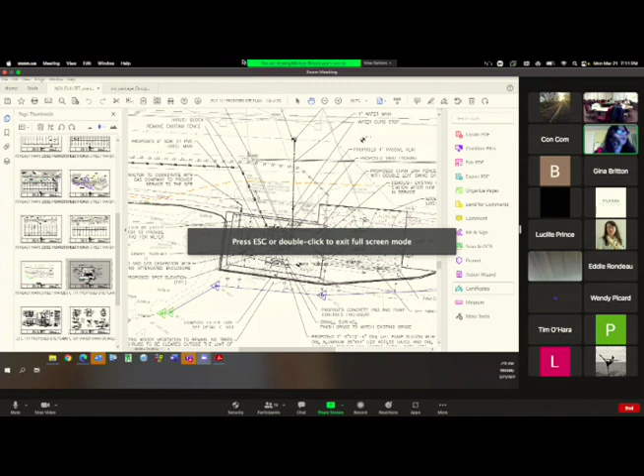Just to dive right in, I'll talk about the changes to the pump station. This is a replacement pump station, an upgrade to the existing pump station on Gilboa Street. The majority of the comments that arose during the last meeting were relative to the position of the components of the pump station replacement relative to proximity to the river. So we made some modifications to the design. The driveway has been reduced from a 13 by 35 foot driveway to 10 by 35, so we pulled it further away from the Mumford River. We're now proposing it to be paved per your recommendation rather than the regrind asphalt. We also designed a stormwater swale parallel to the southern portion of the proposed driveway, between the driveway and the river, to intercept stormwater and conduct it away from the river.

Then in terms of the pump station facility itself, we pulled the fence and the footprint further away from the river. The closest point is now the southeastern corner of the fence, 8 feet to the mean annual high water line of the river, also coincident with bank. We slid the components around and put some labels to show you; for example, the generator is now 15 feet away from the river, and the electrical enclosure stand has also been moved in a northward direction. So all in all the components, including the fence, the footprint, the driveway, are all further away from the river than what was originally proposed.

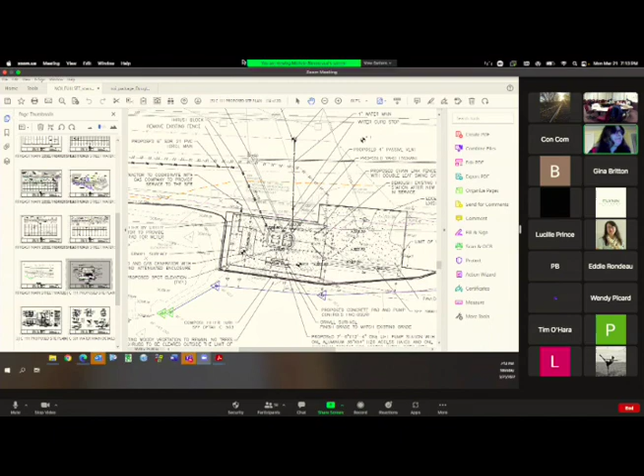Additionally, one of the commission members wanted clarification on what we were proposing to do post-construction between the fence and the river. What we're clarifying is that existing woody vegetation will remain. No trees or shrubs will be cleared or cut for the project. Any remaining disturbed area, for example what was disturbed by the sedimentation control, will be loamed and seeded in a native conservation seed mix, wildlife mix. It's a low maintenance, easy growing, native only plant mix that will be put down in that location and in disturbed areas post-construction.

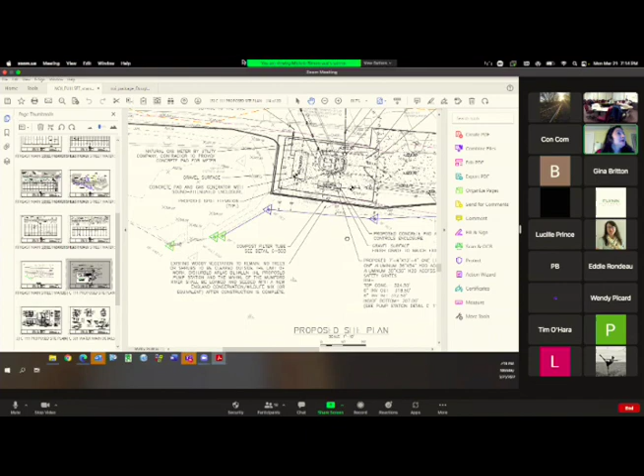I believe that was the majority of the comments for that area. Are there any questions on that, or should I move over to the Northeast Main water installation? I think you've captured a lot of our concerns. Board, any additional comments on the work? You've captured my concerns. I just was going to ask about the swale.

I see some lines there and some grading that are along the edge of the path, but how do we know, where does it convey the water to? Sure, let me call up a detail, and I might defer to Gina, who's the engineer on the project, to address this question, but let me call up the detail that she'll need to help speak to that.

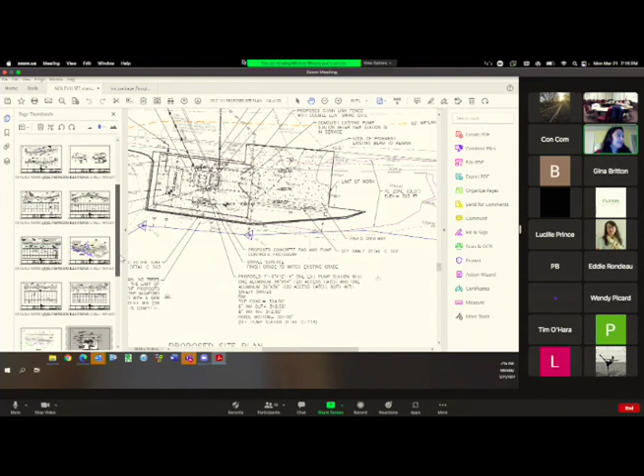That's the right sheet, Michelle. You just have to go over a little. Oh, okay. Yeah. I thought it's because I didn't have my glasses on. Yeah, there you go. There we go, okay.

So what we put in here along the southern edge of the parking area would be just an earth-graded swale with slopes, as shown, to divert any runoff away from the river towards the parking lot, and then therefore into the road. We would request that the contractor, of course, works with the Conservation Commission in addition to providing a submittal on this when it gets ready to be constructed.

So what we also included here was a synthetic liner to help with some of the erosion control. Certainly that's up for conversation if you want something different than that. Okay. The synthetic liner's in the bottom of the swale? Yep, and on the slopes. The filter fabric? Yep, across the whole thing. It's that kind of double line there that Michelle's tracing over.

Is that something permanent, or is that just when you're seeding? It helps to let the seeding germinate a bit easier. So it protects everything. Okay. All right, thank you. Absolutely. Okay, is it okay if I switch over to the Northeast Main Street work?

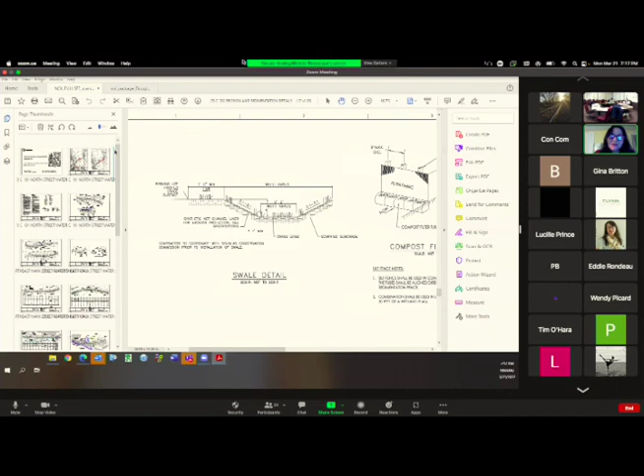Yes, please. Okay, sure. So the comment here on Northeast Main Street, let me get to the right sheet here. Just a refresher that the only work going on here is in the roadway. It's for the replacement installation of the water main. But a question arose about how we would be conducting the work relative to this existing culvert that conducts Wetland Brook under Northeast Main Street.

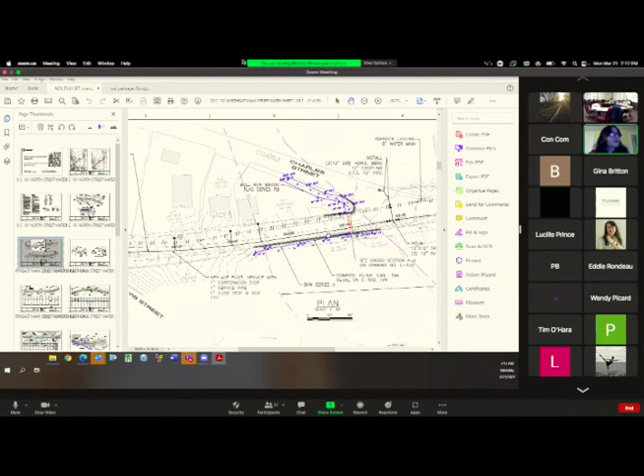So what we did to address that is provide a detail showing where the new pipe would be relative to the existing culvert, and it will go under the existing culvert. So here's the existing culvert. This will be the new water pipe. Gina can explain this more, but the reason it has to be constructed this way has to do with the alignment of the pipe and maintaining grades. The work in the road is still going to be cut and cover.

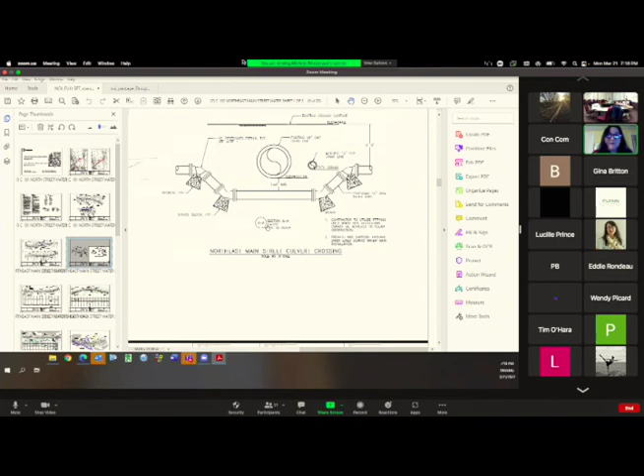In terms of any BMPs relative to the construction of the water main in this location, as Gina mentioned, that would be more of a contractor specification. But this is the detail of how it would be constructed. Steve, did you have any comments on the BMPs that they're using? It was more about the method of how they're going to traverse underneath. I wasn't sure if they're doing horizontal drilling or just the technique of going under the culvert pipe.

Okay. So it probably will be open cut. We haven't designed a directional drill for this application. That's a lot more complicated of a design. It would be a submittal that the contractor would give us as to how he's going to exactly do it when he gets there. Typically, they may excavate on either side and push the pipe through. It's not a major length of a crossing.

I was fine with that. I just wanted to make sure you're aware that it wasn't discussed at the first meeting, and it's really a perennial stream, so the water is going to be there when you hit that section of the roadway. So if they have some methods in place for protecting the stream, and BMPs, that would be fine with me. Okay. Absolutely. Okay, thank you.

Absolutely. And just for the record, we did submit a revised set of plans. Gina stamped them. It's a full set of plans that we resubmitted, revised through March 14th, for referencing the order of conditions. Okay. And Mass DEP also got a copy of all the same materials as well. Okay, excellent, thank you. Yeah, so revised through March 14th, 2022.

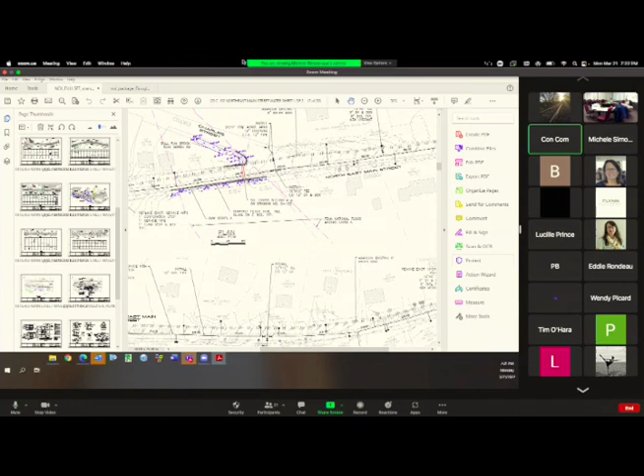Okay, Steve, you did say number 9 was continued, right? I would continue number 9. We're still waiting. We can do April 4th, or you can do the April 25th meeting. Let's do it April 25th. I'll entertain a motion to continue the public hearing for Shore Road Lot 299, parcel 7.16 to April 25th. So moved. Motion made by Mike, second by Mark. All those in favor? Eric Harris, aye. Mike Rocco, aye. Mark Mongemi. Tracy Sharkey, aye.

Okay. Next item I'm going to take is 16. What one did you just do? Number 9. Number 11 is going to take too long. Okay. And then number 13 hopefully shouldn't take too long. All right. Let me get ready.

So 7 p.m. RDA public meeting, request for determination of applicability, 29 Laurel Glades, installing a patio area. The Town of Douglas Conservation Commission will hold a public meeting for Kenneth Boone on March 21st, 2022 at 7 p.m. in the Municipal Center, 29 Depot Street, for work to be done pursuant to the Town of Douglas Wetland Bylaw and the Wetlands Protection Act, Mass General Law, Chapter 131, Section 40. The proposed request for determination of applicability work location is 29 Laurel Glades, and the applicant is requesting a determination of applicability for existing patio and permission to plant trees.

Public participation will be available by attending the meeting at the Town of Douglas Municipal Center located at 29 Depot Street, Douglas, Mass, or pursuant to Governor Baker's June 16, 2021 order suspending certain provisions of the open meeting law, General Law, Chapter 30A, Section 18, the public may participate in this meeting via remote participation. A website for the meeting will be provided on the conservation agenda posted on the town's website, douglas-ma.gov, at least 48 hours prior to the meeting. Copies of the request may be examined electronically by contacting the Conservation Commission at 508-476-4000, extension 205. One time, March 11th, 2022.

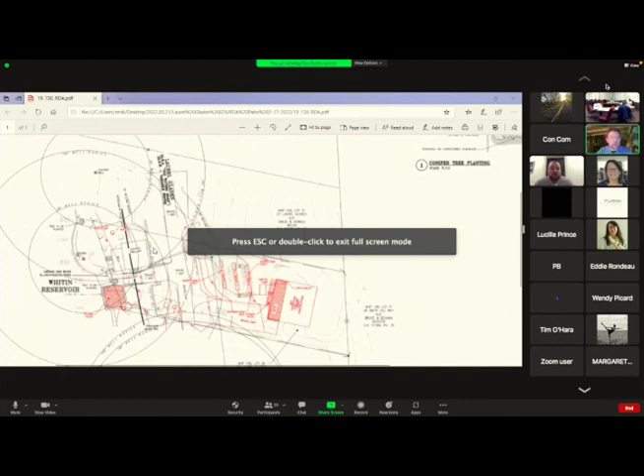And who's presenting for this? 29 Laurel Glades, name and address? My name is Byron Andrews, Andrews Survey Engineer. Take it away. Okay, so if you recall at the last meeting that we attended on this subject, the determination was made to do an RDA for the patio. The patio is in the same location we showed on the as-built plan previously. We prepared an RDA plan, which is another version of that plan, with the exception that we added 2 trees to be planted. One of them is near the patio, and the other one is in the corner of the lot near the water, opposite the patio.

So a total of 2 maple trees proposed? Or what are you proposing for planting? Especially the one right on the, I don't see it, tree to be planted? Okay. Yeah, they're shown in black and white. Okay, so what type of trees? Initially, we proposed maples, but we're open to consideration of what the commission may request. I believe the original order of conditions had evergreens or another kind of evergreen tree or spruce tree. However, our feeling is that maple trees would be better shade for the water, but we're open to the commission's suggestions if they feel otherwise.

Okay, and you've already planted the maples anyway, right? Yeah, we have 4 maples that have been planted so far. Okay. So board, this is essentially permission to allow that patio to remain, in addition to the 2 additional trees.

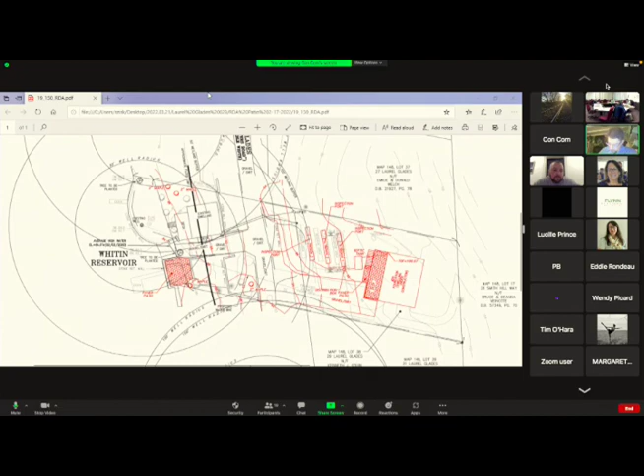So the conditions would be allowing the existing paver patio to remain along with 2 maple trees to be planted along the bank at the northwest corner. Yeah, I would want to be more specific about the type of maple tree. I think that a red maple would be better, rather than just calling out maple. There are so many varieties. Most likely they've got red maple there, right?

Yes. That'll do. Brian Duff, 29 Laurel Glades. The 4 trees that we already planted were red maple, so I would not object to doing 2 more of those. Okay, thank you. Thanks for chiming in. Okay, go with those 2 conditions. I'll entertain a motion.

I'll make a motion that we approve the negative RDA with the 2 conditions that the tree that is proposed for next to the patio be either moved or another tree added in the area next to the bank between the existing well and the dock. Is that what you said, Byron? Proposed tree to be planted.

That's the boat ramp. Yeah, proposed boat ramp. Oh. You want to put it there? Between the boat ramp and the well? Yeah, I think that's where your cursor was. Okay. Yeah, sure. Sorry. That's all right. And what was the second condition? That the existing patio can remain as is. Yeah.

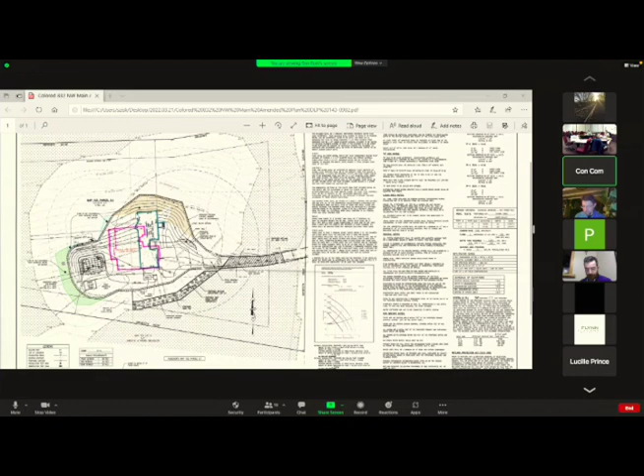But if you go for amended, the original amount of riverfront area disturbed on the plan with the approved NOI is, I think, 7,500. So you have to go less than what was on the original approved plan. I gotcha, yeah, if you're going in order to be amended. Yep. So they came back and they filed a new plan. So I'll bring that up right now. Which brings it under the original amount that was disturbed. Okay. And then we'll just double check, make sure that when we have the amended order, it has all the correct actual calculations.

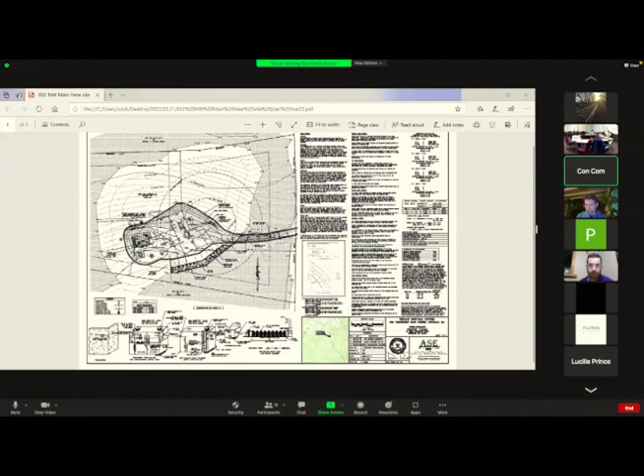Yes, the only thing, I think the new engineer mislabeled the riverfront area. He put 75,000. I think in the original one, Brian, on the order of conditions, it's roughly 97,000. He cut himself short on that. So is the riverfront area disturbance noted on this plan? It is, but he's got the wrong calculations. He's got the amount, let me see if it zooms in. So he's got 7,510 square feet of disturbance, which is less than what was originally approved. So it checks that box.

So what is the number for the requested riverfront area disturbance total? 75,010 square feet. 7,000. Yeah, 7,000. 7,500. Yeah, okay. I kept saying 97,000. Okay. So, board, do we have any questions or concerns regarding this? Or we've got a decrease in impacts? No. Just have to get the numbers right. Correct.

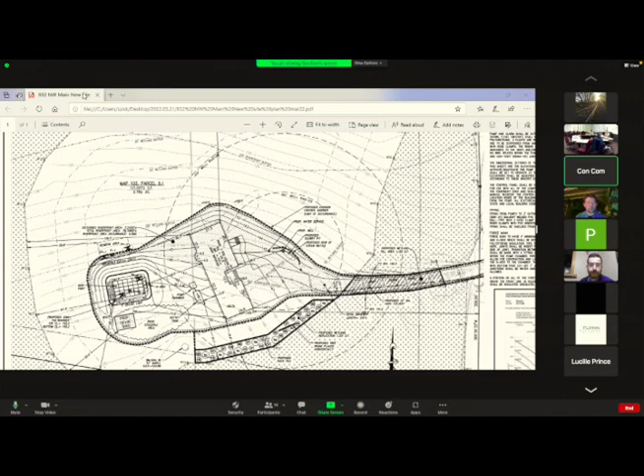Okay. All right. Anyone in the audience have any questions or concerns regarding this filing for 832 Northwest Main? Seeing none, I'll entertain a motion to close the public hearing. Motion made by Mike. Second by Eric. All those in favor? Eric Harris, aye. Mark Mungem, aye. Tracy Sharkey, aye.

I'll entertain a motion to issue the amended order of conditions with the decrease in the total riverfront area impacts. So moved. Motion made by Mark, second by Eric. All those in favor? Eric Harris, aye. Mike Greco, aye. Mark Mangum, aye. Sharkey, aye. Thank you very much.

Okay. Thank you guys, appreciate it. And thank you, Steve, for all your help during this, I appreciate it. You're welcome, Tim. Call me anytime.

Okay, the next three, don't have. Steve, do you want to do number 14? They continue to April 4th. The legal ad didn't get in time. Okay. Number 15, notice of intent, 0 Mumford Road and 5 Forest Street definitive subdivision plan, Sutton Douglas Development LLC. Do we have the legal notice? Should be in your folder. Your mail folder. I have one.

That's all I've got. Oh, what's this? Nope. Not your folder. Yeah, I only had two pieces of paper in the mail, I think. Want me to bring one down? No, I think I probably have it. Hold on. It's the ball one. Okay. Public hearing notice. Oh wait, this is the second. Yeah, if you could bring me one, Steve, that would be great. Please.

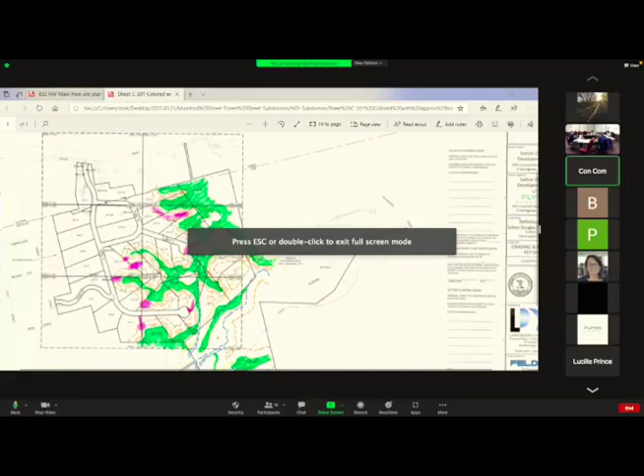Sorry about that. Okay. All right, next hearing, Town of Douglas Conservation Commission pursuant to Mass General Laws, Chapter 131, Section 40, Massachusetts Wetlands Protection Act. Town of Douglas Conservation Commission will hold a public hearing on March 21st, 2022 at 7 p.m. for the notice of intent application filed by Flynn Building Development located at 0 Mumford Road and 5 Forest Street, Douglas, and 61 Duval Road, Sutton, for work to be done pursuant to the Town of Douglas Wetland Bylaw and Wetlands Protection Act. The proposed work involves development of a 31-lot residential subdivision on 5,735 feet of proposed roadway with associated stormwater management system. All work in the Conservation Commission's jurisdiction is buffer zone only, and no wetland alteration is proposed.

Public participation will be available by attending the meeting at the Town of Douglas Municipal Center located at 29 Depot Street, Douglas, Mass. Pursuant to Governor Baker's June 16, 2021 order suspending certain provisions of Open Meeting Law, General Law, Chapter 30A, Section 18, the public may participate in this meeting via remote participation. A website for the meeting will be provided on the conservation agenda posted on the town's website, douglas-ma.gov, at least 48 hours prior to the meeting. Copies may be examined electronically by contacting the Conservation Commission at 508-476-4000, extension 205, March 11th, 2022. Mr. Sullivan.

So, name and address for the record. Hello, Madam Chair, Wayne Bellick, Land Design Collaborative, here on behalf of Sutton Douglas Development. We're joined by Tim Flynn tonight, who's participating remotely.

And if I could, I noticed that Steve has an exhibit up here. I sent Steve some information today, a PowerPoint slide presentation. Yep. And I would like to just have that up because we can follow that. Yeah, let me grab those while you talk. Hang on. All right, thank you, Steve.

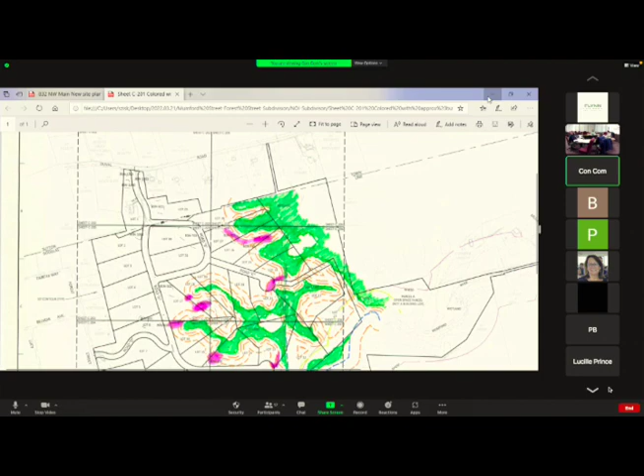Did you get a DEP number yet? We have yet to receive that. Did you try and call him? I did. I know that Kimberly Roth is reviewing it. Okay. They're usually pretty good for that. They do request them and usually pretty good. But not sure what's going on. It's crazy. It's okay, I got it right here. Town of Douglas got theirs before you. I'm sorry? Town of Douglas got theirs. That's what I understand. And you must file that.

It was a nightmare with the advertising with the T&G. That was a train wreck. Wait, can you see that, Ryan? I could see it. Okay.

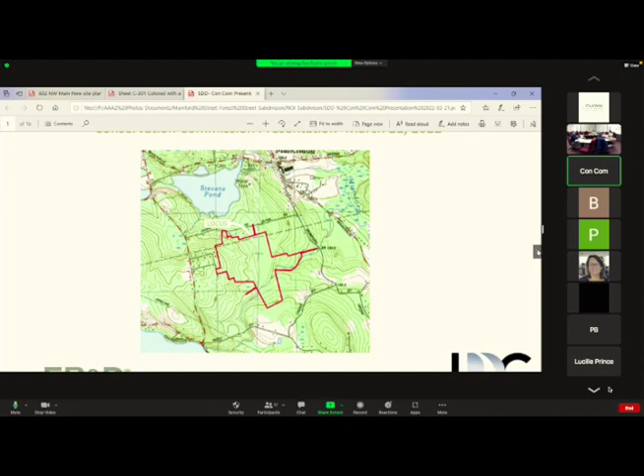Okay, Madam Chair. Again, Wayne Bellick, Land Design Collaborative, here on behalf of Sutton Douglas Development and Tim Flynn. If I could ask you, Steve, to scroll to the next slide. So again, the project owner is Sutton Douglas Development. The applicant developer is Flynn Build and Develop. We're Land Design Collaborative. Land surveyor was Feldman Geospatial. The wetland scientist was Northeast Ecological. And the hydrogeologist on the project is Corporate Environmental Advisors.

Thank you. So, first thing I wanted to do, Madam Chair, was get you up to speed with where we've been with respect to the hearings. So we opened, or tried to open, with the Douglas Concom on March 7th. As you know, there was a hearing agenda, but again, due to a T&G faux pas, we couldn't hold a public hearing. We then, on March 10th, met with the Douglas Planning Board, opened the public hearing, presented, and the hearing was continued to the 14th.

On March 14th, Sutton Planning Board opened the public hearing. We presented there as well, and that is continued to April 11th. And the project presentation, of course, is going to be by LDC, and then we'll get into the question and answer period. Next. Project permitting history.

So this commission will recall back in May of 2021, the resource areas that were delineated by Northeast Ecological Services were confirmed by this commission. We received preliminary plan approval by the Sutton Planning Board.

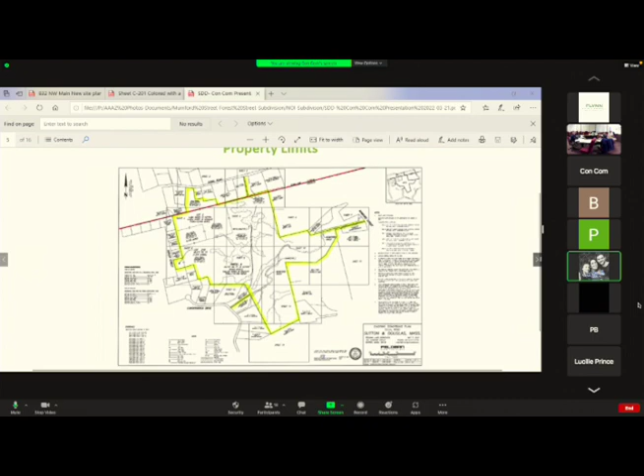So this exhibit represents the existing conditions plan, a blow-up of that area. What you see in here in the lighter green is the wetland delineation and the wetland system that was confirmed by this commission last year. As you can see, to the north of the site at 61 Duval Road, there's an existing home with access to Duval Road. To the southwest is 5 Forest Street that also has an existing home on it. Those are the only two portions of the property that are currently developed with residences.

The site is, again, 130 acres, generally wooded, and topography on site starts at a high on the westerly side of the site and descends at various grades down to a wetland system through the center of the site. It's hard to see, but there is a ditch, there it is, thank you, Steve, that goes from south to north. And that eventually flows into a 36-inch corrugated metal pipe culvert under Duval Road.

Now, I bring this up because of the runoff that comes onto our property. As you folks are familiar with, the Forest Street development was developed by others way back when, and as we did our due diligence in the field, collecting data and confirming topography and delineating the limits of the watershed, what we observed was that the stormwater runoff from that subdivision is totally unmitigated and flows onto the property. It flows across the property and is collected by that channel that goes from south to north and then goes to Duval Road.

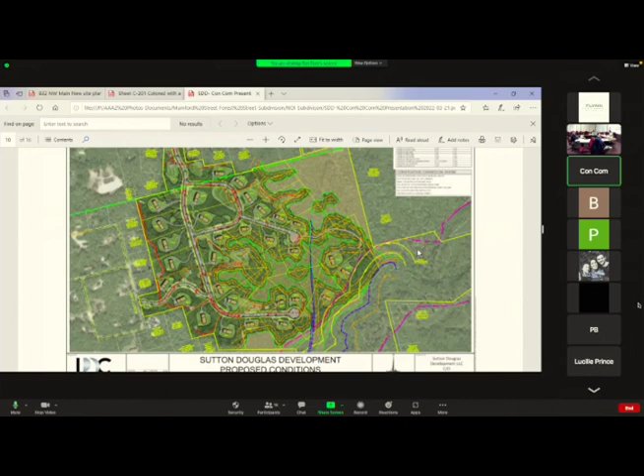And if we could scroll to that second to last slide, I think that kind of tells the story, this right here, Steve. I know that you had requested a slide that showed in red the stormwater management system. It shows all the pipes, it's all color-coded as required by the Commission. You can see there are some buffer zones on the site. There is some riverfront area. We're not doing any work in that, and relatively speaking, very little work in the riverfront area.

So one of my comments from my checklist, I think I submitted last meeting, was that the NOI should clearly state that it's for the road only and the infrastructure. Okay. Right? Any house, any dwelling that is constructed after this notice of intent for subdivision will have to file a separate notice of intent. Correct. And then this has gone for peer review already. That's correct. So as far as our board is concerned, it's being vetted for the stormwater already. So that's taken care of.

So where's the closest point to the resource on here? Where is what? Well, if I could go to that last slide, it probably might have it.

If you're asking me to remember, I'm an old man here, Madam Chair. Okay, all right. So the prior slide, I'm sorry, Steve. So, no, the next one? Back the other way? One more? Yep. One more? Oh, I think we're going the wrong direction. Go second slide from the end, Steve, please. Giddy up. That's it, right there. There you go. So this might be able to answer the questions, Madam Chair.

Thank you. But if you could just clarify that this is just the roadway, so when there's houses that are going to be built, they would need to come back and they may impact more buffer and wetland. Absolutely, and I'm going to take a look at the application. I thought it was pretty clear, but maybe it was a faux pas on my end, but I thought it was for the roadway and the infrastructure. Well, it should be, but it's just not. Usually they put road only on your description. Gotcha. Yeah, because it says development.

Because in this plan, we do have it in our local bylaw regulations, 4.06 self-imposed hardship may come into effect. So as you develop some of these lots where you're crossing that ditch and you're crossing some wetlands, you just have to take into consideration that you could be creating your own hardship for some of these future developed lots. Understood.

You may want to look at that local bylaw. Yeah. Which section was that, Madam Chair, again? 4.06. The regulations. Yeah. The Douglas wetland regulations. Yep. Yeah, the public notice was development of a 31-lot residential subdivision on 5,735 feet of proposed roadway with associated.

So it could be ambiguous on that. Yep. So as far as revising the application, we just need to let DEP know that it's just roadway only. Yep. That might be also why they're taking their time with that number. Okay, well, actually, board, do we have any questions for right now? Mike's already seen this. Mike, do you have any questions at the moment? Not at the moment.

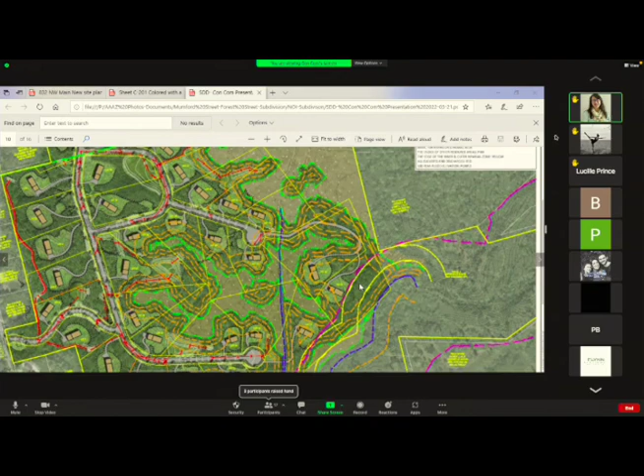Okay, anyone online have any questions or concerns regarding this hearing? There's a hand up at the top. I have a couple of people who have their hands up. Yeah, thank you. Stephanie, would you like to go first? Name and address for the record? Yes, Stephanie Cavino. I am in Worcester, but my boyfriend is an abutter at 24 Mumford Road. My questions are a couple of things. One is regarding stormwater. I know that you said this is going out for third-party review, and I'm just wondering what design storms you used when you were doing that. So did you use TP40 or NOAA Atlas 14?

Yes, I appreciate the question. Please mute yourself if you're speaking. Someone is speaking right now. So I was just wondering what design storms you used for that? That was, through the chair, the 2, 10 and 100, as required by the state stormwater regulations.

In terms of the design storm itself, there's older data that's TP40 that looks at a specific group of storms from the 1890s and 1950s. We know it's outdated and it doesn't account for a very long history. Some newer data, I know DEP has not made this change yet, but they do anticipate changing requirements in order to use NOAA Atlas 14, which uses a larger history of data from the 1800s through 2014. It still doesn't account for larger precipitation events due to climate change into the future, but it is a little bit more representative to ensure that our infrastructure is actually going to last and be able to handle these storms. So I'm not sure which of those data sets you used.

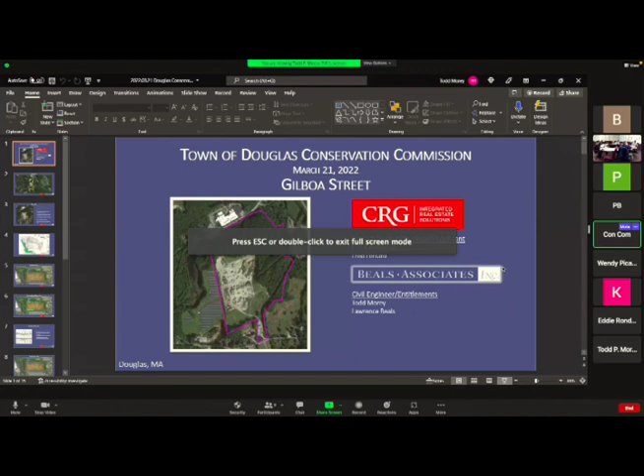All right. So, as noted, I'm here on behalf of CRG Real Estate Solutions. Frank Pecunis and Fred Ferraro typically attend these meetings with me. They were at the planning board meeting a couple weeks ago, and they'll be here, I believe, on Thursday as well. Again, my name's Todd Morey. We're the civil engineers and entitlement managers for these projects that we do with CRG. The project itself is located just off of Gilboa Street, right on the Uxbridge-Douglas town line. It's primarily located within the existing gravel pit, just to the east of the solar facility here.

We were before you, I believe it was late fall, early winter, to present an ANRAD application that was subsequently approved. You folks issued an ORAD after Mr. Allen had reviewed it and done some peer review work on that. Basically what we came up with was the Mumford River flows in here and forms Gilboa Pond, which is really held back by an existing dam. Water flows over that dam, and the Mumford River then meanders its way on out. And then we had some associated bordering vegetated wetlands right next to Gilboa Pond, and some areas of the 100-year floodplain.

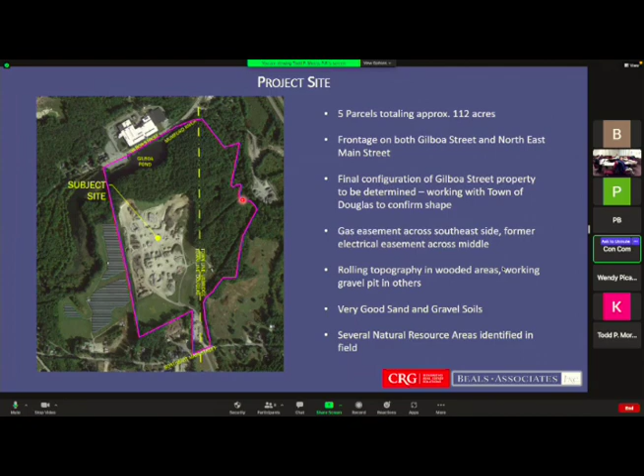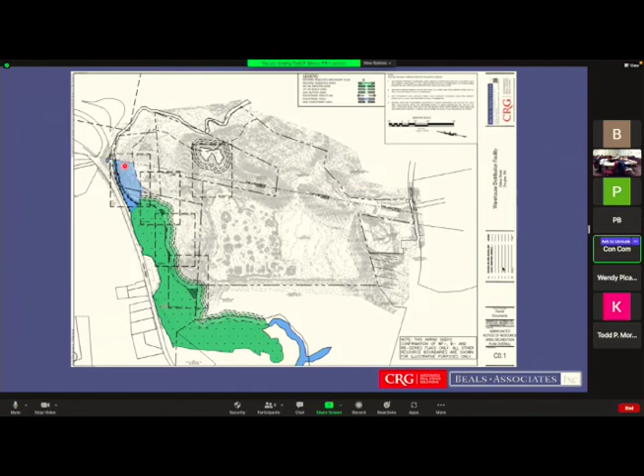Outside of the gravel pit itself, in the wooded area, it's generally rolling topography, no consistent trends, a lot of low areas. Depending on what time of year you go out there, especially up on the Uxbridge side, there may be quite a few low-lying areas, isolated land subject to flooding. In Uxbridge, I think it would be an isolated wetland if it were here in Douglas. Soils generally across the site are very good sands and gravels, given the current use. This is really just a copy of the ANRAD plan that you folks approved. Again, we have Mumford River coming in to Gilboa Pond, this green area, flowing over the dam, and Mumford River coming out. This light blue shade denotes the 200-foot riverfront area within Douglas.

So what are we proposing to do? Our proposed site plan is about 1.1 million square feet of building space, the majority of which is located right in that gravel pit. We have a lot of stormwater management, both underground and surficial, and approximately 651 parking spaces across the site. This shade of green is really where our off-grading occurs, and these dotted lines are your no disturb and other buffers here in Douglas. For the most part, we're staying outside of the 100-foot buffer zones. The two main reasons we're here this evening is we do have impact into the riverfront area, and a minor area of impact into the 100-year floodplain, which I'll show with more clarity shortly. And of course, the riverfront disturbances right here.

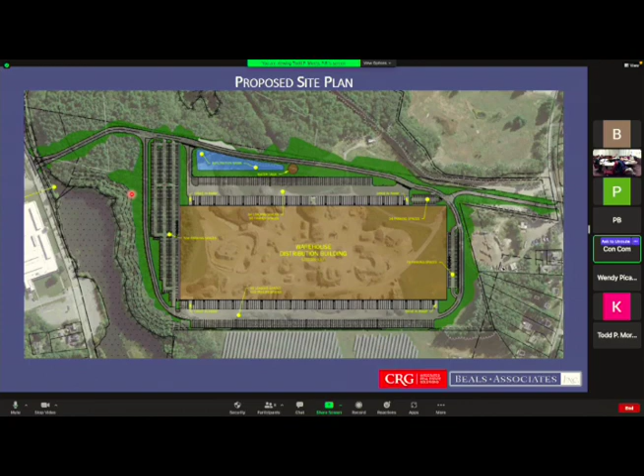Stormwater management, I'll go through again, I'll try to zip through these fairly quickly. The bright green that you see up here on your screen is really a series of catch basins and manholes that lead to some of these underground infiltration facilities. Again, in this gravel pit, some incredible infiltration opportunities. It is just pure sand and gravel right down to the water table.

This end of the site here, generally, we're cutting about 30 feet in elevation, and this end of the site here, we're actually filling about 30 feet in elevation. These systems that we're proposing underneath this truck loading apron are actually concrete chambers. They're about 15 feet tall inside. They are very deep. However, given the fact that we're filling on that end of the site, very simple construction. As we start to bring those fills up, we drop those chambers in and continue to fill right up around it.

Following up on a question that was asked at the last one, those numbers that we modeled that on are either the NOAA 14 or the Cornell numbers. I'm not sure which off the top of my head, but it is in the stormwater report. It's not the old TP40 data, in case anybody's wondering.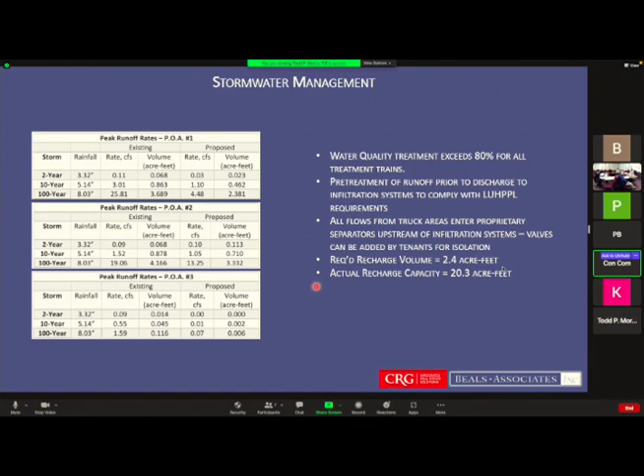And then the recharge, mentioned this a couple of times, tremendous opportunities on this site. The required recharge for a site like this, given the amount of area that we're using, would be about 2.4 acre-feet of water. We actually have over 20 acre-feet of recharge capacity in those systems, as well as the surface pond that you can see on the site plan. Utility plan, probably not all that interesting, so I'm going to skip by that.

So just when we thought we understood what was going on, we got an email from MassDEP, and I've never gotten an email like this from them before. I've gotten emails where they give me the number, so we do have a file number. It's right on there. It's 143-1042. I noticed that wasn't on your agenda. But they came back and they said this project should be filed as a limited project for roadway and driveway crossings in a riverfront area.

I spoke to the other principal in our firm. The two of us kind of laughed and chuckled at that. He advised me to take this, print it, frame it, because we're never going to see it again. So,

even though that's what they want us to do, and we followed up with a letter back to them, this is really all we had to change to make it a limited project. Under 7B, we checked the 1 box instead of the 2 box, the yes box instead of the no box, which we originally had. So that's really the only change we made. We're not going to change our design. We think it was a pretty good design to start with.

We were at 6.4% disturbance in the riverfront area. So we were below the threshold anyway. So my guess is what they did is they actually must have read our alternatives analysis, realized that Gilboa Street entrance was really the only way to do this. Even though we actually did have access out to Northeast Main Street, it was not good to go out there with trucks because it causes some other crossings that would have to be widened.

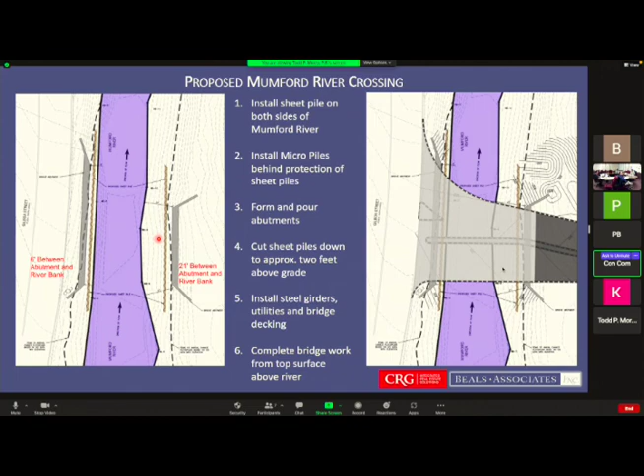In the middle of this slide, I just gave the big picture overview steps of how you build it. Again, install the sheet piles on both sides, install your micropiles behind that, form and pour the abutments, cut the sheet piles down, install the steel girders. We do have utilities being hung from that bridge, and install the deck surface. All that fun stuff.

I'm not sure exactly who did that flagging, but it differs in elevation than ours. So usually when we see riverbank flagging, the definition of a riverbank is either your first break in topo or your mean annual high water, whichever is lower. I admittedly did the riverbank flagging on the right side of this screen a little bit lazy. I did the first break in topo, conceding the fact that if the mean annual high water was actually lower, then that's fine. We'll just go with that first break.

Theirs was higher? Theirs came out higher. So I drew this thin dash line here. So you go across the bottom of the river, and you can see you go up the bank to get to theirs right there. So it's fine. It's a bit of a discrepancy that we noted on the plans. If you look carefully at the plans, you'll see that it kind of meanders up through. Okay. We stayed behind it anyway. Okay. All right, that's good.

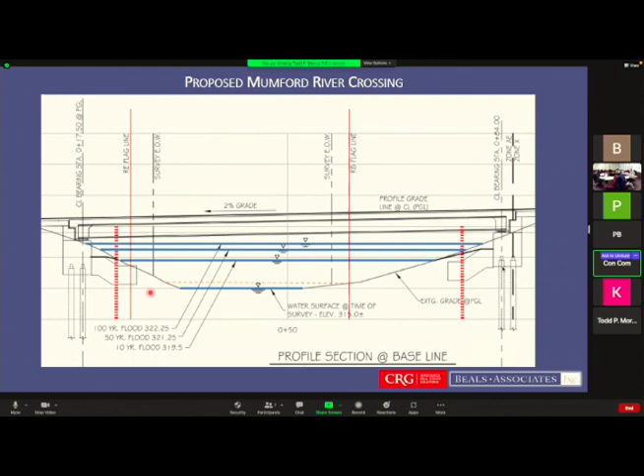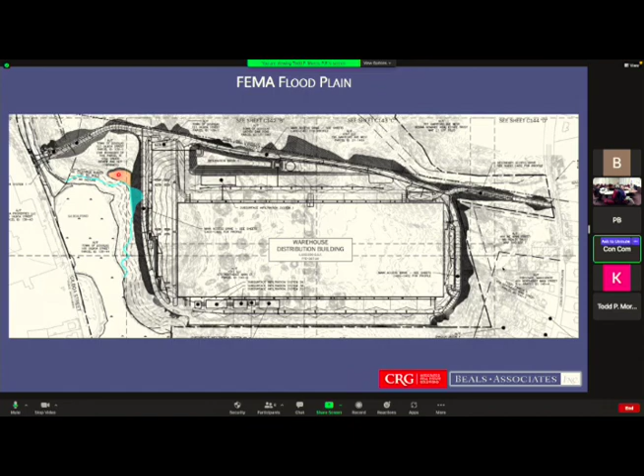And from a volume perspective, when we did it on a foot per foot basis, just about 3,200 cubic feet would be impacted, would be filled. We got about 5,800 cubic feet that we're creating outside of the existing floodplain, but still connected. So about 180% of the volume we're placing in there. And then just discussing interests of the Wetlands Protection Act, but that's probably more for when you're ready to start talking about an order of conditions, which you're probably not there tonight.

Are you anticipating any additional comments from DEP? I'm anticipating no additional comments from DEP. We are, as you're aware, under peer review. Yeah. So I'm waiting to see what comes back on that. Okay. So DEP was pretty much in agreement with the compensatory storage and with the bridge construction. Like I said, I think they must have read the alternatives analysis, which I'm glad they did, because more often than not, it seems like they don't.

They're being very thorough these last couple of years. Very thorough. So one sentence is pretty impressive. I haven't seen that. I was like, who reviewed that? If I've got to put together 6 or 8 inches worth of paperwork and send it off to them, then I'm glad they're reading it. Yep. Okay, so. Okay. That's my quick one. Looks good? Looks good?

Mark? Just a couple questions. Water table. You noted that there's a 30-foot cut on the upper side and 30-foot fill. Where did you locate water table on the site? We never found water table up on this end. We found water table about 3 feet below grade right down here. The closest we got to water table relative to our finished floor, we do have a couple of borings right in this location, where my dot is, where it's fairly close to the finished floor. It's close to finished floor, so. Yeah, but we've got a slight fill in that spot too.

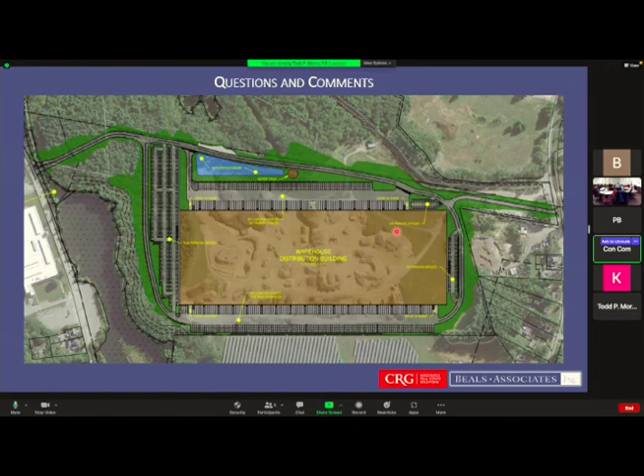Now, all the infiltration, was it on the lower side, on the south? Let me go back to that grading plan for you. So we have some large tanks here along through this area. We also have a small system over here. Another, I'd say, medium-sized system there. And then up here, this is actually a pond basin, open to the air. So we have different types, different locations. All towards that end. Western side or that side.

Yeah, it's a deceiving site when you go out there. I know I didn't pick up on this the first time that I looked at it. It's a large site, and there's a lot more topography across the floor of that pit than you realize. It's interesting. But that's exactly why all that stormwater is on that end of the project.

Right, and I'm thinking, just out loud, I'd like to see some infiltration on the upper side so that you're spreading out where the water gets into the water table underneath, instead of it all just going down to the low end. And then when it gets infiltrated, it just goes to the river and it's gone. But I understand there's difficulties in doing that because of the topo and elevation. Let me take a look at some of the borings. It would also cut down on some of these pipe runs if I could put some shallow systems up in here.

It's certainly something I'm happy to take a look at. If the borings come out looking like we've got some good soil... the problem is when you get into cuts that deep, you start to get a little iffy on the soil and on what you're running into. So if he's running into clay lenses and things like that down deep, I'm not sure we can do it. But if he's still hitting some of the bony material, absolutely.

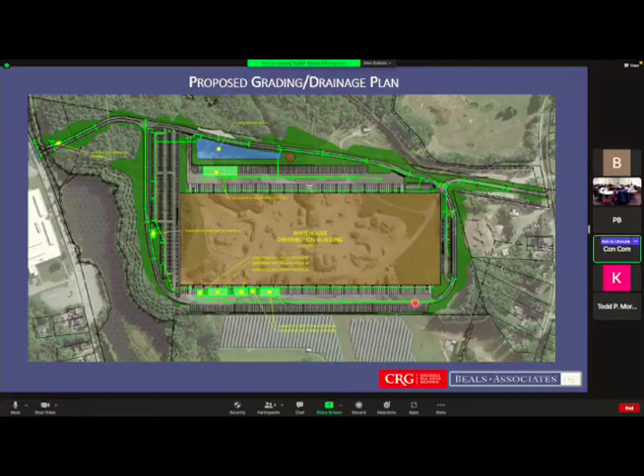So board, if we don't have any further questions, we'll just wait for the peer review and continue to April 4th. Sounds good to me. At 7 p.m. April 4th, 2022, 7 p.m. I'll entertain a motion. So moved. Motion made by Mark. Second by Eric. All those in favor? Eric Harris, aye. Mark Mungem, aye. Tracy Sharkey, aye. Thank you very much.

Looking forward to it. Oh, I see a big plan over there. Do you have like an 11 by 17, smaller size? You submitted Monday night? Oh, you did? It was already here, so I figured I'd wait for this. Okay, all right. Do you have anything, Miss? I'm Becky Callagher, I'm on the agenda. Okay, all right.

What do we have? Okay, the proposed Bay State Trail location. My apologies. Come on to the table if you'd like. Actually, my biggest thing is, Steve said I needed to come to this meeting to set up an appointment with somebody, or how many of you would want to do something with me out there, so I could get some further information. Oh, okay. Yeah, we have that email in our packet. I've pored over it already. Okay. Did you have any comments, Mark?